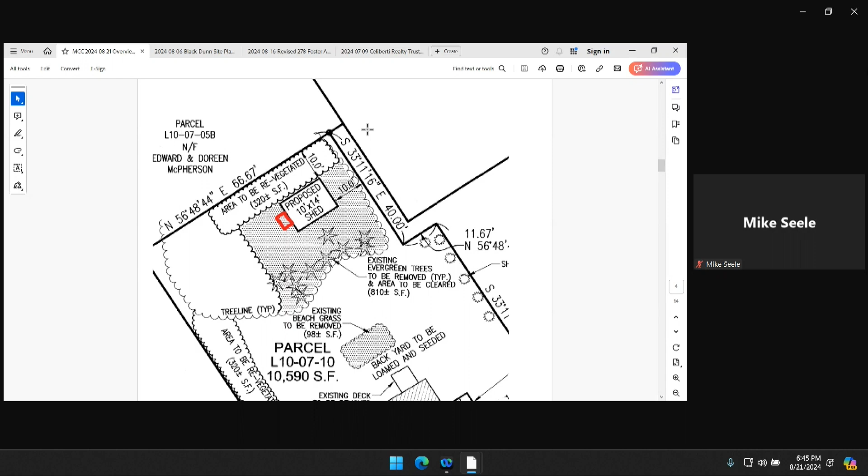I would say, once again, this can be captured on the as-built when you are finished. Thank you. You're welcome. Thanks, Mike. Thank you.

Okay, that concludes the business. There are going to be two continuations tonight. If anyone is here or listening in for 12 Careswell Street, that's not going to be heard tonight.

Our first hearing is 0 Main Street. This is a continued hearing. Is there anyone here? Yes, this is Greg Morse. We hear you loud and clear. I guess so. Great.

Okay, the hearing officer is Vice Chair O'Donnell. So this was continued last time because we were waiting for some advice from town counsel. Basically, because of the 21-day rule, we're required to approve this. And I think we were leaning towards approving what's proposed here, the crossings for the machinery, for the test pits. I believe we felt that was satisfactory.

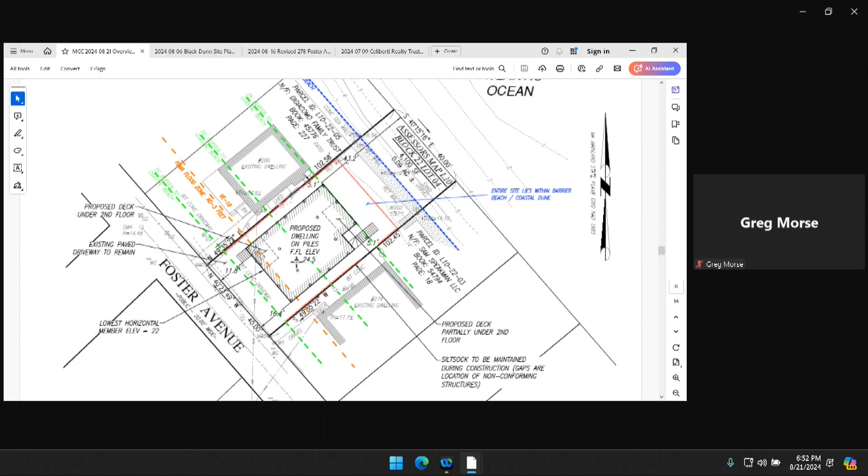Okay. Mike, did you have any? Yes, just for the record, all administrative requirements have been met. Additionally, the applicant wishes to demolish the existing home on a concrete foundation and construct a new home on an open pile foundation. Interestingly, the plans indicated there would be a 72 square foot increase in impervious area. I talked to the engineer and the contractor, the surfacing under the home would be pervious. The impervious calculation originally accounted for the square footage of the roof, thus the increase in impervious area, but the area underneath the home is actually pervious to allow water to run through the subsurface.

Okay, and did you have any plans for skirting or walls? So for enclosure, typically we'll do a lattice, but it would be probably vertical, like 1x5 PVC. And in most of the homes we do, we leave 6 inches so the water can come and go underneath. It won't necessarily be the whole house, because this house, the lowest horizontal beam will be at 8 feet, so they're hoping to put some cars under the house in a pinch. Okay.

Any other commissioners have any questions? I think I have one. Did you have one, Bert? I don't, cutting you off.

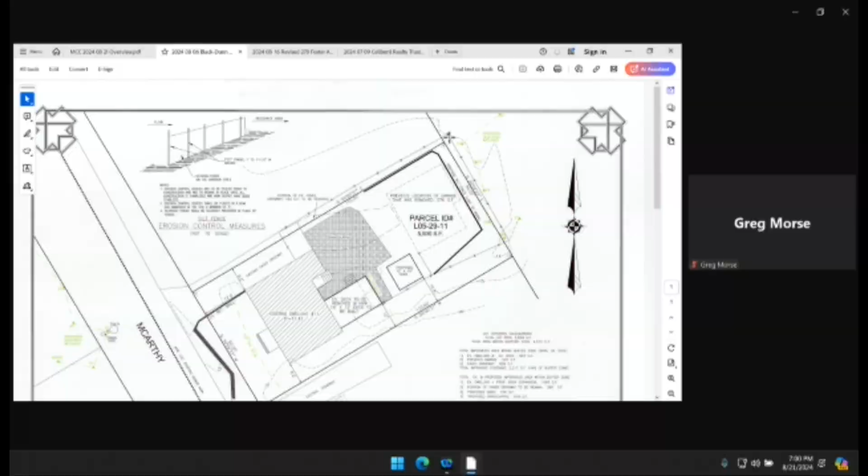And that's also in the wetlands, so if we can get that moved out of there. It does cross into the wetlands too, so the fence would have to be pulled back. That wouldn't be a problem to bring it back in even 10 feet. I don't see a problem with it.

Yeah, he's talking, right here. Oh yeah, yeah, that's fine. I mean, you can't use it now. Right, right. Okay.

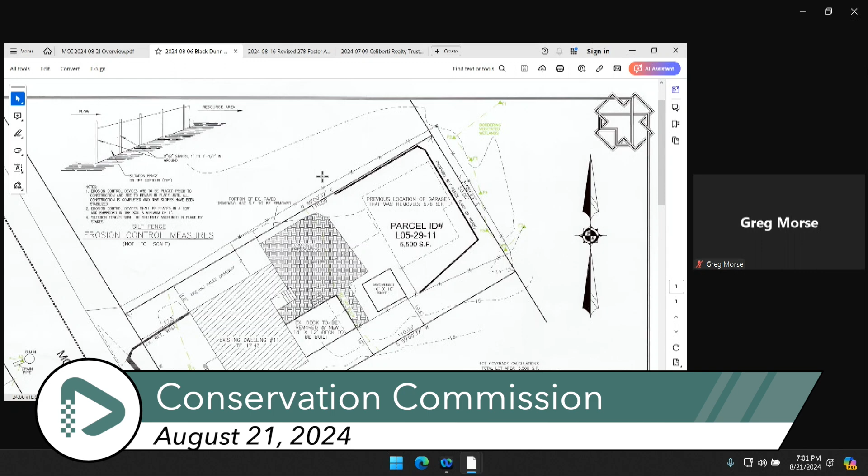And conservation markers, Mike, along the back? Conservation markers would be beneficial. They could be placed along the extent of the silt fencing here, or essentially anywhere where the former garage was. Right, so if we move the actual fence in, we'll say 10 feet, we'll have to figure out where it'll fit, and then put the conservation markers right in front of the fence? That'd be satisfactory, yeah.

Yeah, they'll protect the conservation markers too from someone knocking them over. I've seen people ride lawnmowers. Oh, the thing was in the way. Well, that's their problem. Oh, we've seen it all, trust me.

Okay, so we are gonna need an updated plan with the fence where we think the fence is gonna be, and a cross-section of pervious pavers, okay.

And note where, what do you think, 3 conservation markers? Yeah, 3 conservation markers, so I can even call you and you can come out and say, okay, right here, here, here, that would be acceptable as well.

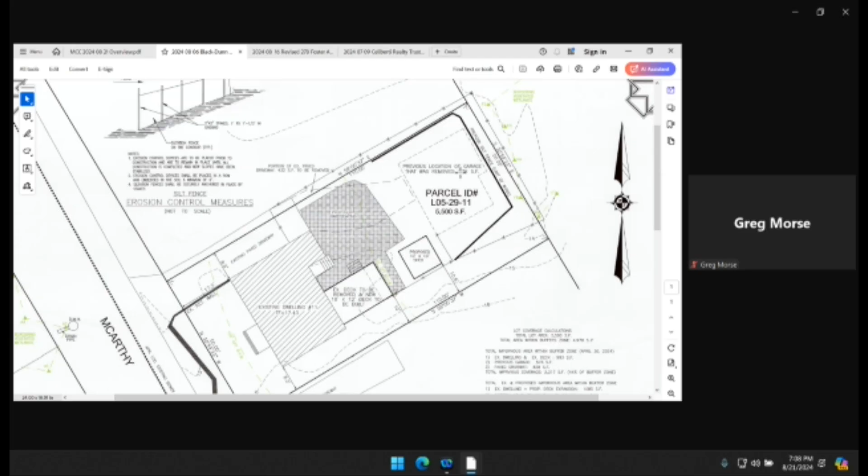Where would you do this? Right at the very back of the garage, actually right where the flagging is - pick a line, see where the fence shows right now? The only spot that goes into the wetlands is in the right-hand corner.

Now, if we took and put, say, a foot or two feet wide of riprap in there - 6-inch stone, with filter fabric paper under it so it doesn't get washed out from underneath - any water coming down will hit that and it will slow down. It won't stop it, it's not supposed to stop it, it's just supposed to slow it down. I don't want it to wash out, so I want to make it go as slow as I can across the lawn and then come in.

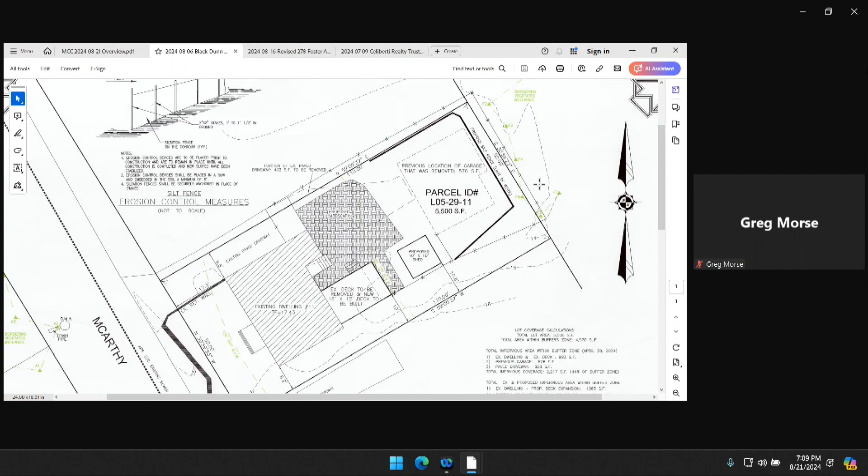I would say we can approve this tonight if you are going to add that. Well, he said to ask the board—I've done half a dozen of them for the town of Hanson already. I'm not entirely sure that would be needed on this property, considering the grading of that lot is fairly flat. As long as you're happy with the way we're gonna do it, I don't have a problem with not putting it in.

He was just saying, if you wanted to slow it down even more, we did the Hanson dump and a few other ones for them, where it works. But if you don't think it's pretty steep enough to worry about, then we won't worry. It's a flat property, and I'm not an engineer.

I don't know whether it's—well, it's gonna come out, it's gonna still have a pitch on it. The idea is if it drops into something, it's gonna dig a hole. If it slows it down enough where it flows into it, that is a way to rectify it if we do have a problem in the future. It's something we can put in.

Is it acceptable to say we're not going to require that or recommend it, but if, when you get into the project, you feel it is necessary, we'll come back, I can call you and we can talk and amend the plan? The flatter I make it before it gets to there, the slower the water's gonna go.

Now, if we have a 9-inch rainstorm—right, well, that's different. But for normal rainstorms, it should be flat enough. I'm just thinking, because we've fixed a lot of the problems they had over there with washouts by using that method, and it does work.

I think, without signs of erosion there currently, it could be problematic bringing in fill that close to the wetlands. Well, it's not fill. If it does prove to be an issue where erosion's an issue, trap rock could be beneficial in that area, and the commission could always reconsider. We don't have a problem with that either, either way. But if it works the way it is, we'll leave it that way.

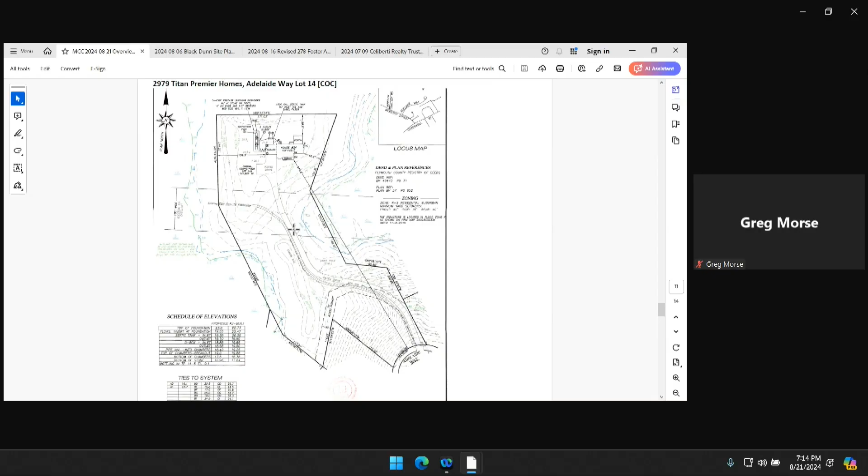SE 42 2979, Adelaide Way, Lot 14. Did you look at this, Mike? Yes, I took a look at it. It's been built according to the approved site plan. Another thing to note, which wasn't reflected on the proposed site plan, is that all of the conservation markers and trail markers are in place on the driveway as well. I move to issue a certificate of compliance for SE 42 2979. May I have a second? Second. All in favor? Aye.

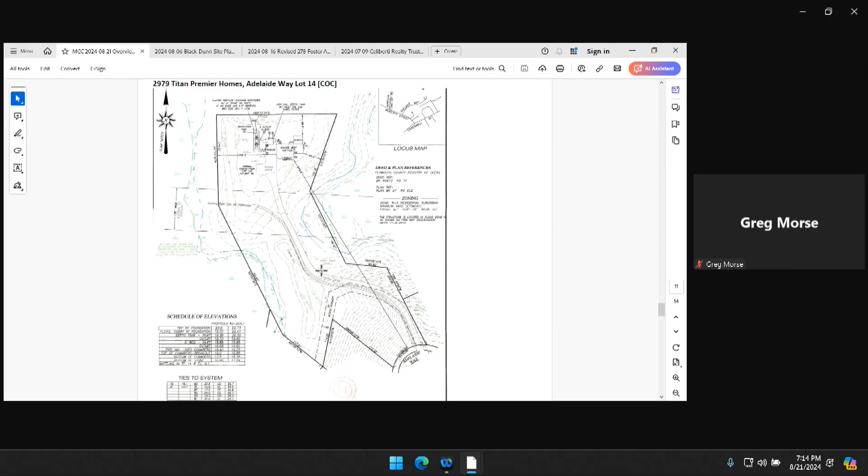SE 42 2217 and 2217A, John Sherman Estates. I move to issue a one-year extension so that a solution to the encroachment into open space can be attempted there. May I have a second? Second. All in favor? Aye.

Excuse me, may I address that? Sure. I'm Paul Driscoll, trustee of the Realty Trust that owns that subdivision. I wanted you to know that according to Greg Guimon, the building inspector, within the last couple of weeks gave the owner of the encroaching property a letter to correct the encroachment within 30 days. My understanding is if that's not complied with, there will be a daily fine imposed. That follows considerable communications between the planning board and the homeowner over several months that did not result in a correction.

I know they were going to attempt a negotiation with an abutting property to take a sliver to replace the encroachment on the open space. I take it that was not successful. According to my understanding, it was not. I talked to Greg probably 2 or 3 weeks ago. He said that was their intention. I called him today, and he said, to the best of his knowledge, the building inspector notified the homeowner in writing and gave him 30 days to rectify it. Now, whether the rectification includes the complete work that removes the encroachment, or just some proposed plan accepted by everybody, I don't know. But that's the present status.

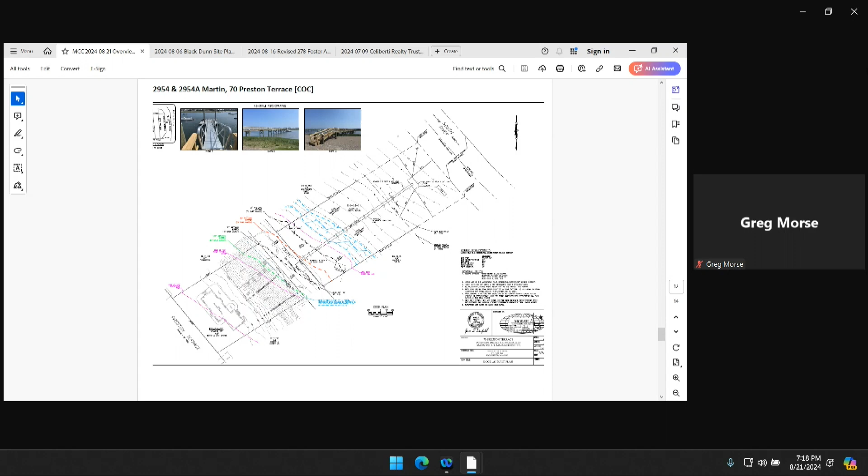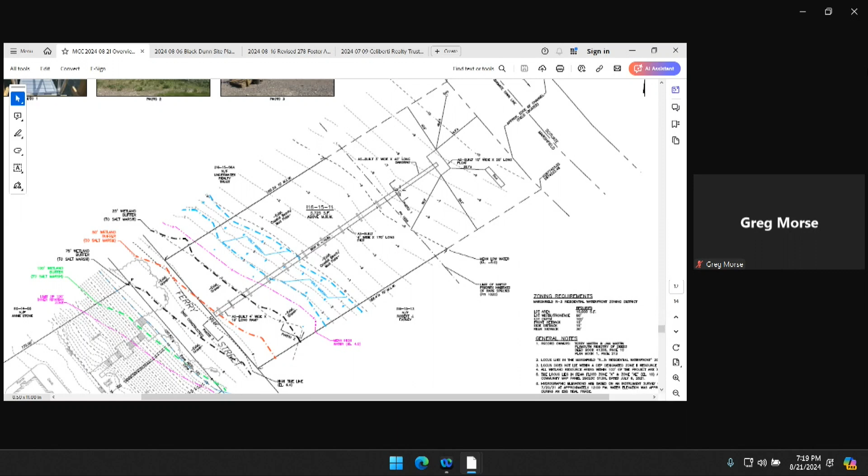Okay, so they didn't go out any further, they just went for a more gradual slope, is that correct? Yes. So by changing the gangway, the float's still in the position that we said it was going to be in, because we need to have the underwater clearance for kayakers. So it's just trading off the length of the pier for the length of the gangway.

I believe so. I actually did not scale out exactly where that float was. I could do some more research into that ahead of next meeting. I think we want to hold and make sure, because that was the concern - if they've got a longer slope, does that impact the navigability under it? So let's take a look and be sure. It seems like there's also some unanswered questions from the building department, so it seems like the best idea is to wait and see these answers.

I move to table this until we are certain that our requirements are met. May I have a second? Second. All in favor? Aye.

Actually, I see it's a Morse plan, and Greg Morse was still on. We could have asked him, but now he's gone.